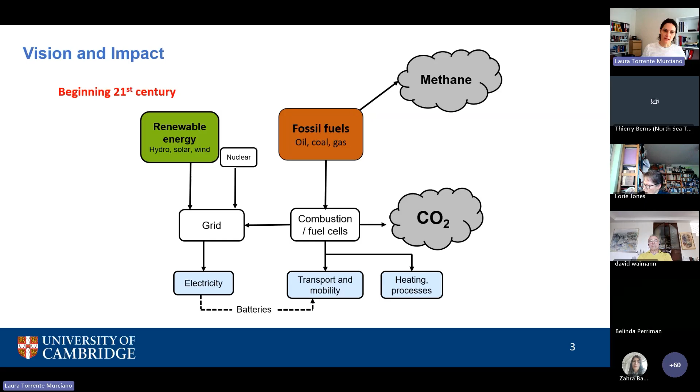Our vision is we can fully replace fossil fuels by using ammonia, and that will obviously also produce green fertilizers and decarbonization of part of the chemical industry as well.

Ammonia can occupy the space of fossil fuels because we can produce it directly from renewable energy. It will store energy, and as I said before, the methane and ammonia molecules are not that different, so they store and release energy in exactly the same way.

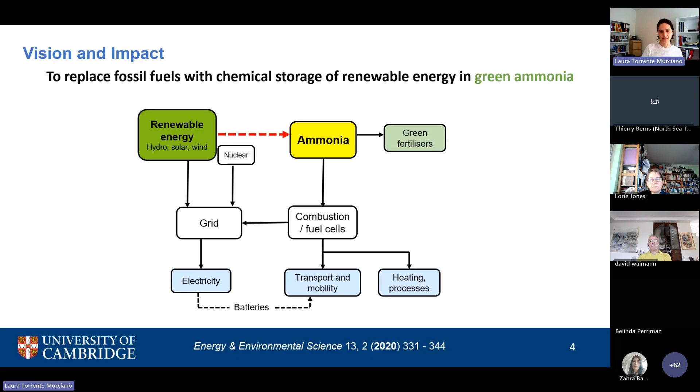Going a little more in detail about why ammonia is a carbon-free energy vector: it has a very high energy density, it can be liquefied at very mild pressures at room temperature, and it has more hydrogen in liquid ammonia than we can store in a 700 bar hydrogen cylinder, because of the high energy and volumetric density.

The other exciting thing is it's very versatile. I was saying before that fossil fuels are very good because they are versatile, we can use them in different ways. Ammonia presents similar characteristics, so we can crack it and release hydrogen. My group has been working on that for 15 years, on how to produce hydrogen efficiently from ammonia.

There is very exciting research about how to use ammonia directly in fuel cells. And the thing that is exciting me a lot these days, though I'm not an expert here, so I'm looking forward to the Cardiff presentation, is direct ammonia combustion in combustion engines.

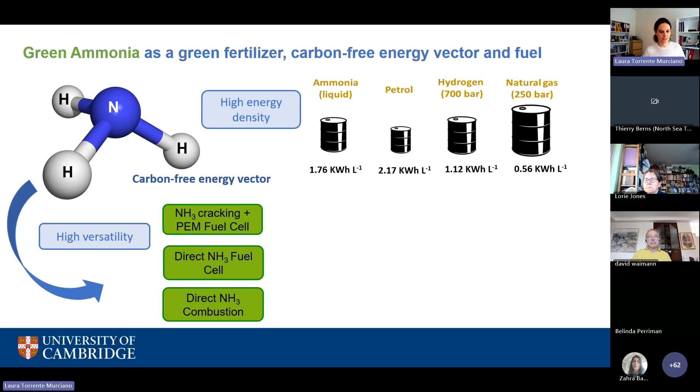The other important thing is we already have an infrastructure, a transport network for ammonia. This map shows how ammonia is distributed around the world, with the different dots being ports where ammonia is traded. This is because of the fertilizer industry, but that means we know how to handle ammonia, we know how to transport it, we know how to store it. So all that knowledge is already there.

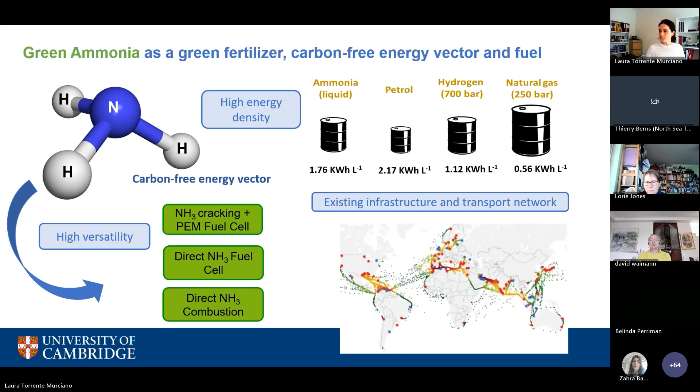Now, how do we do it today? How do we make ammonia? What are the issues of making ammonia today? Well, we use the famous Haber-Bosch process, and this is something that is so important we even studied it in A-levels. It's a process that, without going into loads of detail, consists of two steps.

The first step is hydrogen production, where we take, as I said before, natural gas, fossil fuels, and produce hydrogen. The second step is the ammonia synthesis loop, also called the Haber-Bosch loop, where we combine hydrogen and nitrogen to produce ammonia. These two steps are hugely integrated, and this is a process that has been optimized for over 100 years.

Loads of small innovations and new technologies mean this process is now reaching almost the thermodynamic limit, so it's a fantastic piece of engineering. But because we use fossil fuels, this process is also responsible for around 1.2% of CO2 emissions. To put that into perspective, 1.2% CO2 emissions is similar to the whole aviation industry.

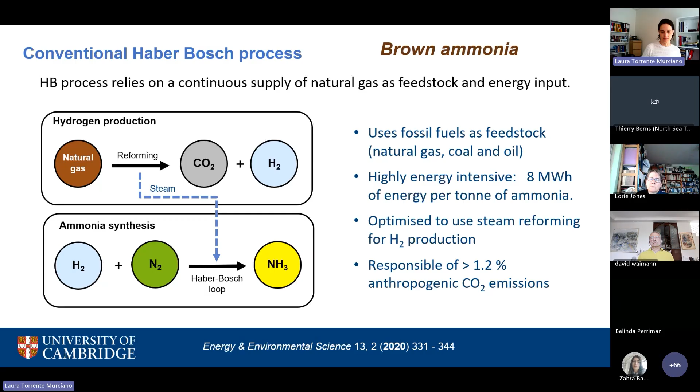So just for fertilizers, we should decarbonize this process. But if we can use green ammonia as a way of also storing renewable energy, then we will fully transform society and be able to decarbonize it.

So green ammonia is not that different if you think about it. It also has these two steps, but in the first one we produce hydrogen from water splitting, and the second one could be exactly the same. I'll explain in a few minutes why it cannot be.

The main thing is, you probably noticed an arrow connecting the first step and the second one when we produce ammonia from fossil fuels, and that is energy being transferred, integration happening between these two steps. When we produce green ammonia, that whole integration and optimization breaks down. So we need new processes to make green ammonia efficiently and, as a consequence, cost effective.

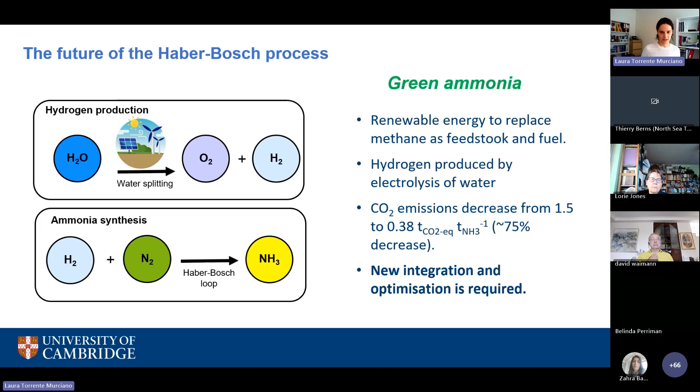So where are we? To produce green ammonia, this scheme shows we will use renewable energy, electrolyzers for hydrogen production, and then the Haber-Bosch loop I mentioned before. What we have in this cycle is, on one side, an intermittent source of energy, and that is the main problem in making green ammonia or even decarbonizing any process, what we call power-to-X chemical processes.

And then on the other side of this circle, we have green ammonia production, which runs 24/7 for years, at a constant capacity. So how do we manage this kind of imbalance? An intermittency on one side of the equation and a constant energy demand on the other side.

Well, it's as simple as putting a hydrogen buffer in the middle. So we will produce more hydrogen when we have more energy, and then we will consume it at a constant rate. The problem with that simple solution is that it makes ammonia very expensive.

So we've done calculations about what will be the cost of making ammonia in the UK. An average cost is around 1,500 to 2,000 pounds per ton of ammonia. And you can see here the breakdown, which is dominated by that hydrogen buffer.

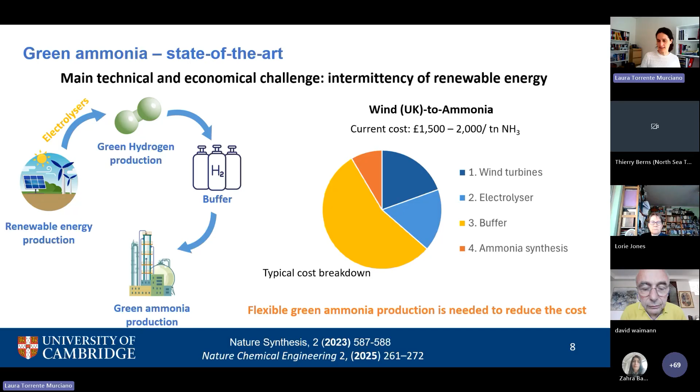So this is a trick chemical engineers know well. You separate your product and recycle your unreacted hydrogen and nitrogen. And by going through the loop again and again and again, you finally convert all the hydrogen. But it's very rigid in the way that it works.

And it's important to say that it's an exothermic reaction. So you need to be very careful with heat management. Otherwise, you can easily go into a runaway situation.

Then what we are doing is inspired by work done at the University of Minnesota by Professor Ed Cussler, now retired, who said, okay, maybe the problem is not the reactor. Maybe the problem is at a higher level, a system level. What if we replace the condenser with a different way of separating ammonia, such as absorption?

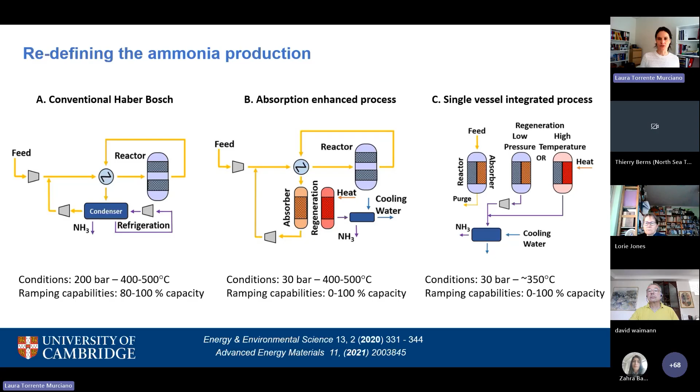So if we compare where we are today with where we want to be, we have a system, the conventional Haber-Bosch, which is designed, optimized, and integrated for fossil fuel utilization. And that is, in my opinion, a false optimization. If we want to use renewable energy, we need to think about completely new technologies, new processes, new ways of doing heat integration.

As I've said a few times, the intermittency of renewable energy is the main technical and economic challenge. This new process is also low capex, very small, so we're challenging the concept of economy of scale. It's designed for intermittent operation and distributed production. We need a portfolio of technologies to make this decarbonization a reality.

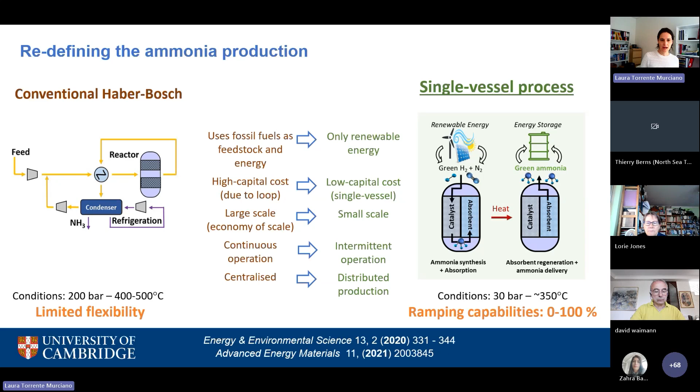Focusing on this, the single vessel process I'm presenting is a two-step process, not continuous. In one step you produce ammonia when the sun shines or the wind blows, but then you need to desorb it, release it, and that requires energy. If you do the energy calculations, you'll see that completely kills the process.

So we have also developed a technology that is able to store heat at different scales. For that we also use chemical reactions, so it's not sensible heat, it is chemical heat storage. What are the implications of this?

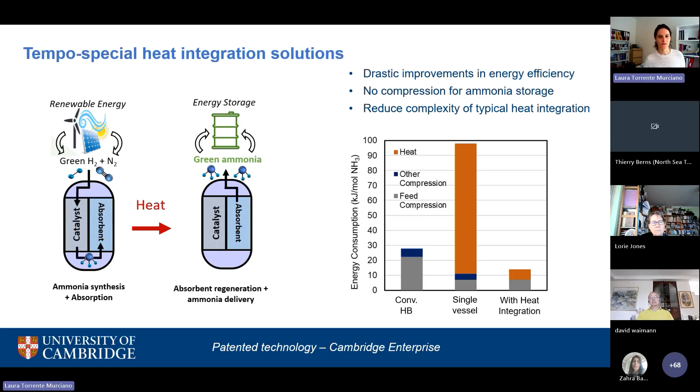Then what we do is optimize what will be the optimum combination of renewable energy production, electrolyzers, hydrogen buffer, and ammonia plant capacity to minimize the cost of ammonia. So we are doing this kind of algorithms to come up with this optimum design.

Here is where I show again that using conventional technology, conventional approaches of designing processes, it's just not possible to make ammonia, even in places with very, very high wind capacity like the UK. It's not possible to make ammonia cheaply enough. We have the technology to do it today.

Now, what we are developing is this concept: when you're talking about renewable energy and considering that the cost of production of renewable energy is dropping to the point that it's cheaper than fossil fuels, then utilization of renewable energy shouldn't be the way of optimizing processes.

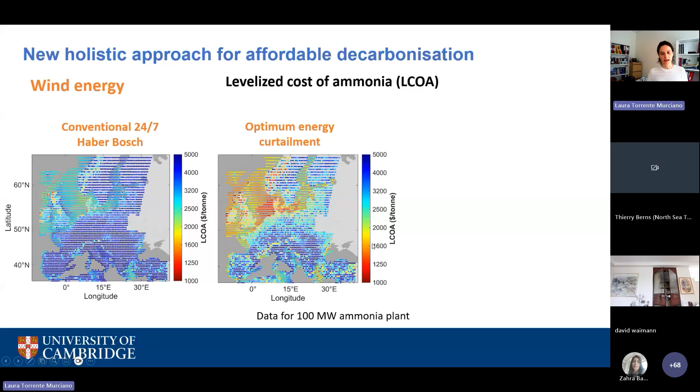Let me change the scale there to show where it is economically feasible. So if we do a combination of solar and wind, and then also use these new technologies, then you can see that we certainly can produce green ammonia cheaply enough in the UK. And this is the right time to do this - the right time to engage with politicians and so on, because the technology is being developed to make this a reality.

So these are a few pictures. This is Mitsubishi in Japan developing combined cycle ammonia turbines and demonstrating them in Singapore. This is a picture of a tractor developed in the States to use ammonia. And this is my group visiting shipping cargo in London a couple of years ago, coming from Singapore to London when the IMO was going to regulate the use of ammonia for shipping.

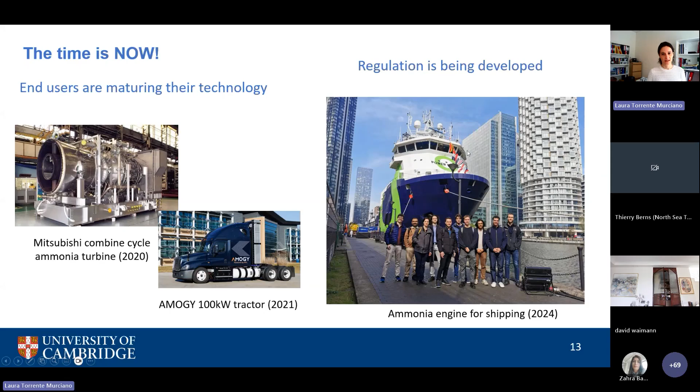So the regulation is being developed. End user technology is almost there. This is the time to produce green ammonia.

So let me finish with, again, the vision. We can replace fossil fuels using green ammonia as an energy carrier and fuel. It has different uses - for transport, fertilizers, obviously, fuel for power generation. And if we do this, then we can produce a completely new energy trade system around renewable energy, similar to the one that we have around fossil fuels today.

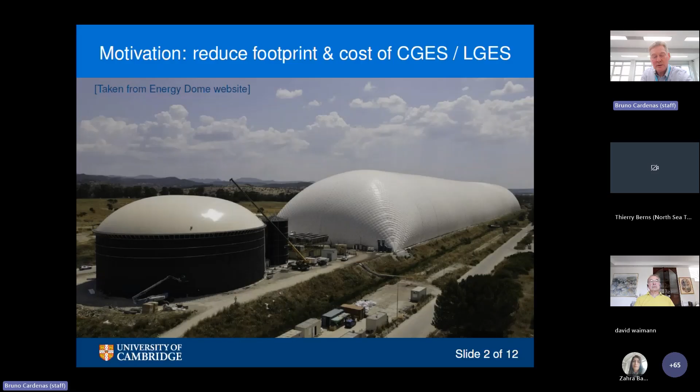In particular, we're interested in making the footprint of these systems sufficiently small that they can be applied to offshore locations where much of the wind energy generation is taking place. And we're targeting, as I've mentioned before, medium duration energy storage, of the order of tens of hours.

When one looks at energy storage applications for storing electricity, one can really divide them into short-term things managed by batteries, medium-term, which might include these multi-day wind lulls, and then much longer duration energy storage, which needs to deal with interseasonal and inter-year variations. There are significant variations in the production of energy from year to year by wind turbines.

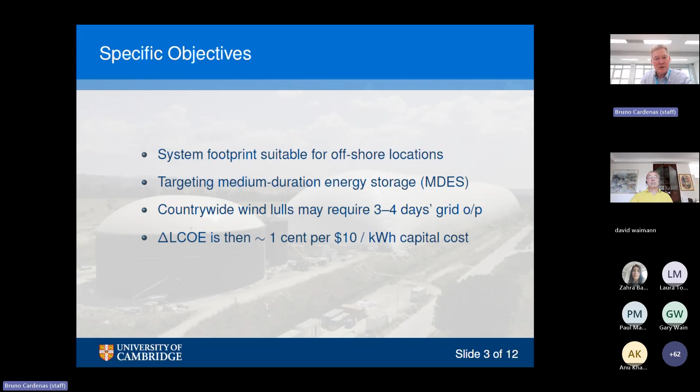The amount of storage we might need to move towards a fully decarbonized grid can be equivalent to several days of total output from the grid. And if one looks at the cost of the storage, it adds very significantly to the total cost of generation of electricity. So whereas one often talks about the low cost of wind energy generation, by the time you've factored in what's needed to make dispatchable power, the additional costs can be quite significant.

So the name of the game here is to look for storage technologies that can really reduce the cost per kilowatt hour of capacity of storage. To put things into perspective, batteries currently sit at probably several hundred dollars per kilowatt hour.

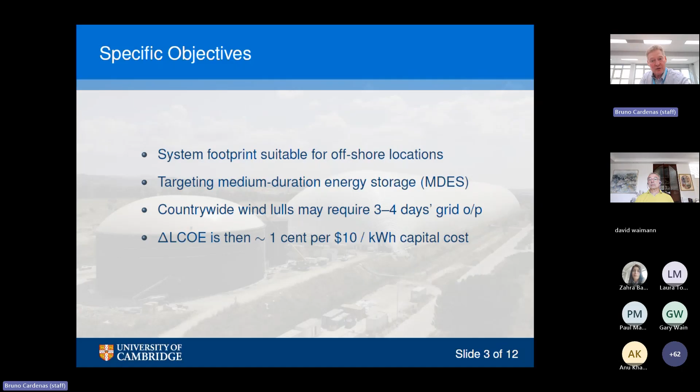So this was, as I say, I wanted to compare carbon dioxide and ammonia - I'll get onto the ammonia in a moment. The idea here is we have a liquefaction plant, and then rather than putting our low pressure carbon dioxide in the discharge state just into a large inflatable dome, we store it by adsorption into some adsorbing medium. One of the best turns out to be zeolite. Even when we do this, we find we can reduce the footprint of the storage facility enormously, because the volume of that stored low pressure carbon dioxide on the surface of zeolites is a factor of 50 smaller than just storing it as low pressure gas.

But there are some difficulties associated with this, in that getting the thermal matching between the liquefaction process and the adsorption process to match each other really requires a heat input. The other thing is that this really turns out to be too expensive, because you need probably about 25 kilograms of zeolite per kilowatt hour capacity of storage, and even with the most optimistic estimates for the cost of zeolite, that adds significantly to the cost.

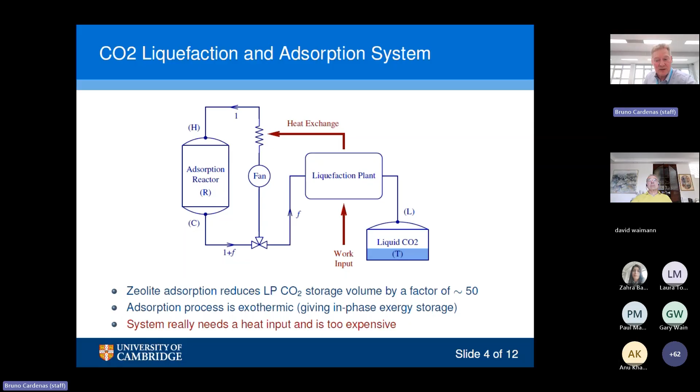Having ascertained that the cost was really a little too high for the CO2 system, we were looking into, with my colleagues in both chemical engineering and mechanical engineering at the University of Cambridge, other possibilities. So ammonia came up as really an excellent candidate for a storage facility.

So if I just emphasize the difference with Laura's presentation, where she's thinking about effectively using ammonia as a fuel - a synthetic fuel, very useful for long-term storage - the focus here is on medium duration, and we're not consuming the ammonia, we're just using it as a storage medium. One very useful feature about ammonia in this context is its very high solubility in water.

So in contrast to the CO2 system, where you'd adsorb on the surface of an adsorbent, here we're absorbing in the water. The tank on the top left-hand side is a kind of saturated solution of ammonia, what Rosa will later be referring to as aqua-ammonia. Our system comprises a separation plant, the details of which I won't go into here. We're trying to find ways of making that separation process as close to thermodynamically reversible as possible, which is a very important aspect for all of these storage technologies. By striving to obtain reversibility, we get much better round-trip efficiencies.

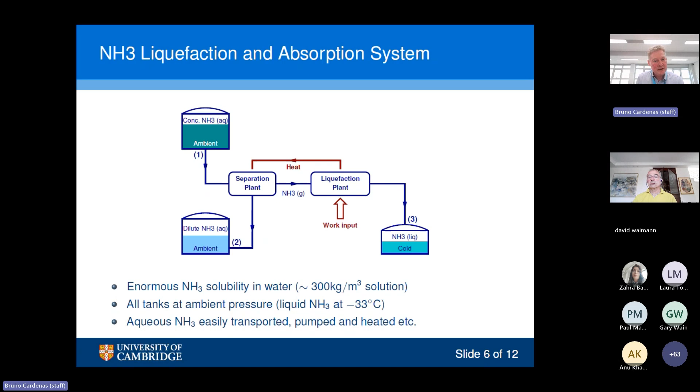In contrast to the CO2 system, because we're storing our low pressure ammonia by absorption in water, we can easily move that solution around. We can pump it, pass it through heat exchangers and so on. That gives us a lot of flexibility in plant design.

I mentioned before that the CO2 system had some difficulties associated with it, and one of those was the fact that the process really needs an additional heat input in order to obtain a reasonable round-trip efficiency.

It's interesting to speculate as to why that is the case. In order to ascertain whether a system is going to need a heat input or not, we can calculate a thing called the maximum adiabatic charge efficiency, and we can do this without needing to know the precise details of all of the liquefaction and separation plant.

We just draw a box, the control volume, the dotted line shown there around all of our plant, and we look at the conditions of storage. Once we've specified those conditions of storage, and we'd want those tanks to be at ambient pressure, that essentially fixes all those conditions, so we can work out the enthalpy and entropy changes associated with the processes.

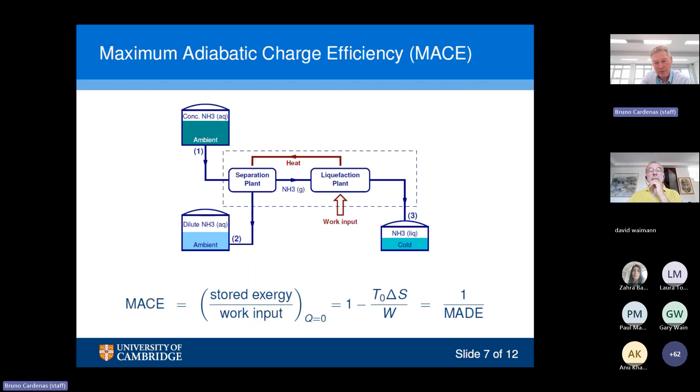And calculate what would then be the maximum charge efficiency, which is defined in terms of the exergy change, i.e. the change in capacity for undertaking useful work, divided by the actual work input. Now, our actual process may not be adiabatic, but by calculating this quantity, the MACE, we have a way of establishing whether our system is going to be able to operate in isolation without a heat input.

So very briefly, I compare on the left-hand side the best we can possibly do with the carbon dioxide system. The best adiabatic charge efficiency that can be achieved there is around about 55%. One has to bear in mind that the round-trip efficiency is the product of the charge efficiency, the self-discharge efficiency, and the discharge efficiency.

So if your charge efficiency is only about 55%, your round-trip efficiency is going to be very low, and that really tells us that the CO2 system needs a heat input to attain a reasonable round trip efficiency. We've got much more flexibility with the ammonia system, and simply by tuning the temperatures and so on, it looks like we can get a system that will be independent of heat requirements.

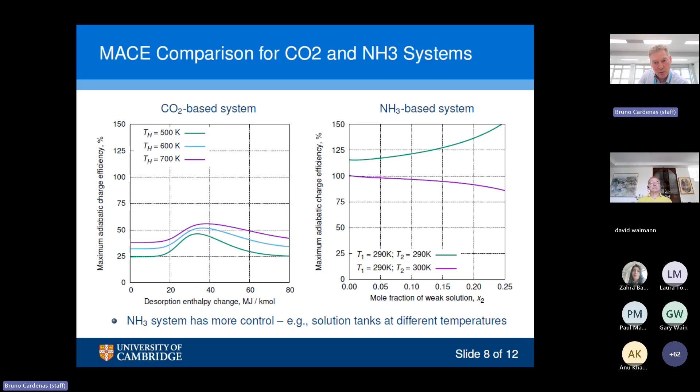I'm just going to finish off by summarizing some of the main features, things we can look at without necessarily going into too much detail of the plant itself. I've got 3 columns here: the energy dome system which I showed at the beginning, the CO2 system based on absorption within a zeolite, and the ammonia system based on absorption within water and liquefaction. The table shows some of the key features.

Because the energy dome system involves storing liquid carbon dioxide at ambient temperature, the relevant pressure there is around about 65 bar, which makes the storage process quite expensive - you have to pay for those pressure vessels. With carbon dioxide, we cool it down to close to its triple point, at which the pressure is about 6 bar, so that reduces that storage cost considerably.

But with ammonia, we can do even better. You can store liquid ammonia at 1 bar, slightly lower energy density - you see the figures there: 66 kilowatt hours per meter cubed for ammonia, 76 for carbon dioxide. But the reduction in cost more than compensates for that.

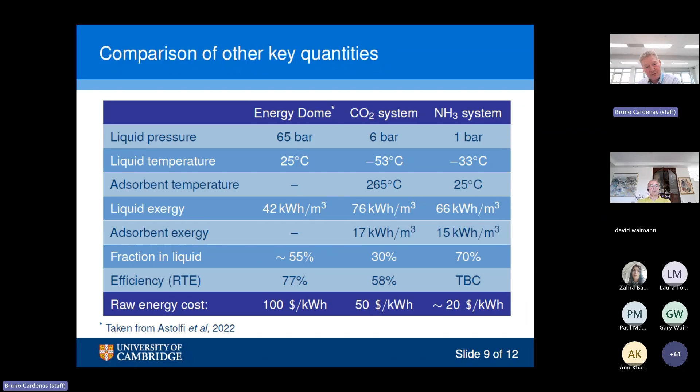Round trip efficiencies: the energy dome system does very well. The CO2 system less well. Our NH3 system is to be confirmed - there will be some challenges there, but these are perhaps worth pursuing given the benefits in terms of reduced cost. So there's some estimates of the raw energy capacity costs here - I should stress these are the costs per unit capacity of storage, not per unit of energy delivered.

And really, I can't stress enough that if we're going to try and decarbonize totally the electricity system, the demands for storage are really very substantial indeed. So getting down those per kilowatt hour capacity costs is very important.

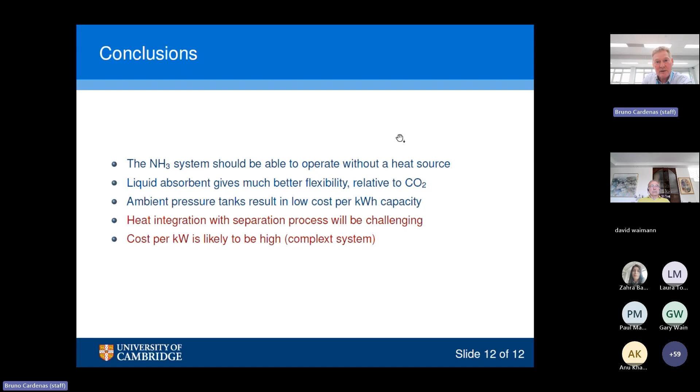So with that, I will finish my presentation and I'm happy to try and answer questions.

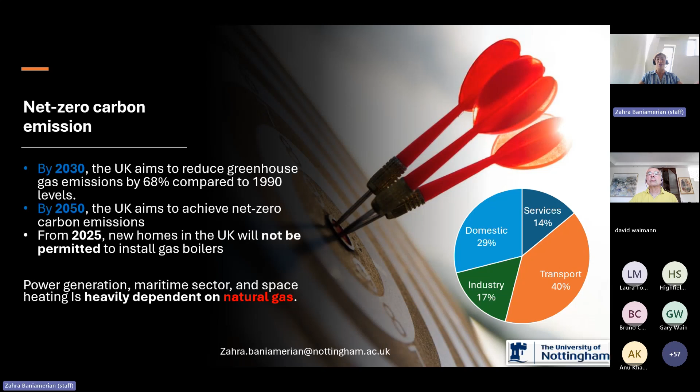So let's start. This is net zero week, so you have heard a lot about net zero targets that we have by 2030, by 2050. I'm not going to bore you mentioning all of those. The thing we know is that we are in urgent need of finding an alternative - better to say an ultimate alternative - to natural gas. It's not like we don't have any available alternatives.

For space heating, we do have heat pumps and electric heating that you could categorize together. But the problem with heat pumps and electric heating is that they cannot be an ultimate solution. If you want to shift toward using electricity for heating purposes, you will require a huge upfront cost to upgrade the grid - it strains the grid and the grid cannot handle it.

Hydrogen was also a choice for space heating. However, it does have significant storage and transportation challenges. And also we came to the point that hydrogen is not suitable enough for residential application if you want to think about it as space heating, but it still does have potential for power generation.

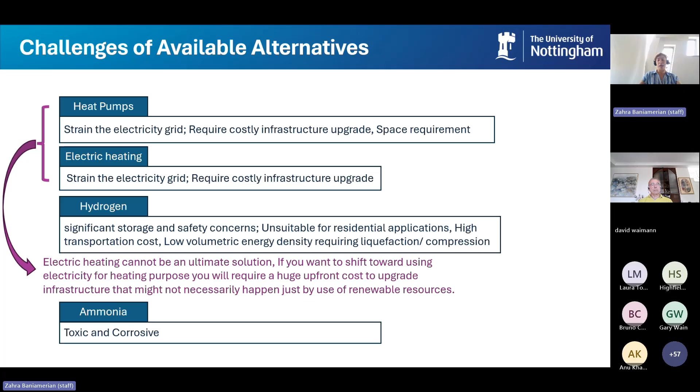As another alternative, we have ammonia, which always has a problem with its toxicity and corrosiveness. So we started a concept here at the University of Nottingham called safe ammonia or aqua-ammonia. It's formed by dissolving ammonia in water, and it shares all the benefits that ammonia has while it minimizes its drawbacks - toxicity and corrosiveness.

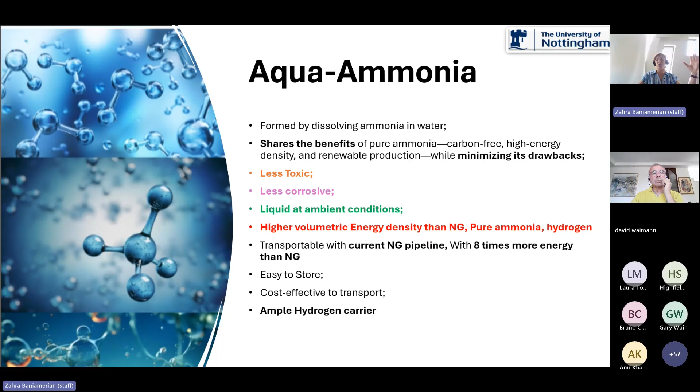Because we're talking about a dilute ammonia, it is less toxic and less corrosive. The most important attribute here is that it is liquid at ambient condition, and at ambient condition it has higher volumetric energy density than natural gas, than pure ammonia, and than hydrogen. It is transportable through pipelines - this is a very advantageous point - and it's very easy and cheap to store because you could ship it in cheap tanks above ground near ambient pressure.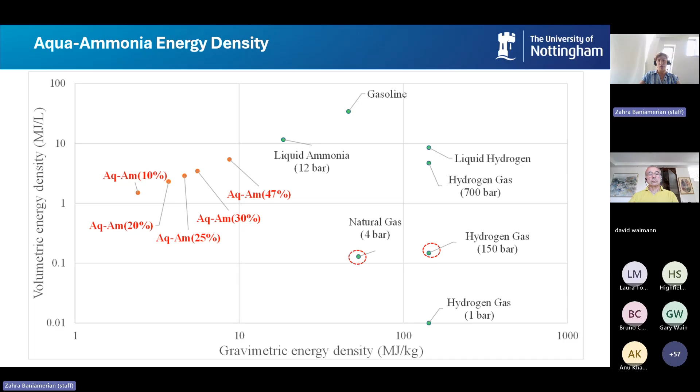At 30% concentration, aqua-ammonia is stable at ambient condition. The whole idea with aqua-ammonia is quite simple: we prepare aqua-ammonia and then transport it through pipelines. This could be a current natural gas pipeline, or it could be a dedicated pipeline, because it has a very simple structure, very similar to a water network. So we prepare the aqua-ammonia and transport it through pipeline until it gets to the target points.

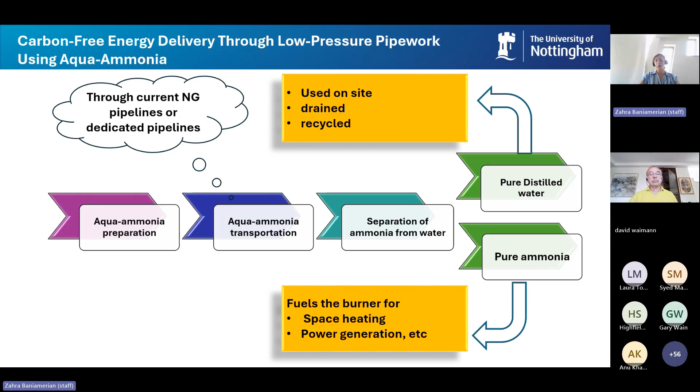Upon arrival at the target points, we separate ammonia from water. We have pure ammonia that can be used for any application currently reliant on natural gas, so it could be used as a fuel for space heating, power generation, or anything else. And we have pure distilled water that could be repurposed, recycled, or safely drained.

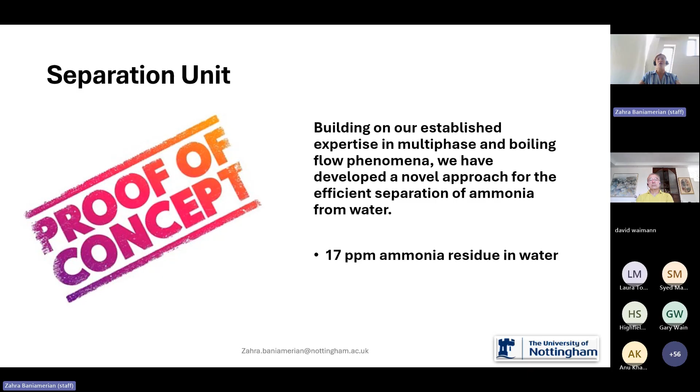We knew at first, when the idea was conceived, that the feasibility of the aqua-ammonia concept fundamentally depends on the ability to separate ammonia in an energy efficient and economically viable manner. So we started this research, and we reached the point where we can separate ammonia from water very cost effectively and energy efficiently, leaving just 17 ppm of ammonia residue in water. This amount is way below the standards for safe discharging.

Since early '23, when the concept formed here at the University of Nottingham, we secured some funding and made a demonstrator for the separation unit. We had some publications and lots of great industries on board with us. We started designing different architectures of systems using aqua-ammonia, like aqua-ammonia in power generation, boilers, district heating, aqua-ammonia heat pumps, and aqua-ammonia in the maritime sector.

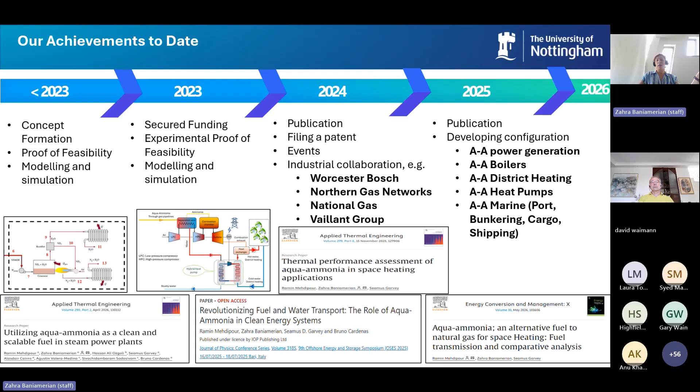I'll give you a very brief introduction to each of these architectures of using aqua-ammonia, but feel free to scan these QR codes to go into any detail you want, because they lead you to a paper we've published for each of those applications.

The first application is using aqua-ammonia for space heating. The idea is quite simple: we prepare aqua-ammonia and transport it through pipeline to the end users, which could be residential or industrial units. Aqua-ammonia feeds a boiler - an aqua-ammonia powered boiler - very similar in size to a natural gas boiler. It has an integrated separation unit that separates ammonia from water and burns the ammonia for hot water and space heating. The transmission line would be 1/3 the size of a water network.

If repurposing the natural gas network for transporting aqua-ammonia is not an option, that could still work, because we have been doing research on that. If instead it's a dedicated transportation line, the size needed for aqua-ammonia is just 1/3 of a water network, and as simple as a water network. For space heating, if we want to cover the whole space heating demand of the UK, we just need 13% of aqua-ammonia to cover that demand. And this 13% is comparable to home cleaners, so it is quite safe.

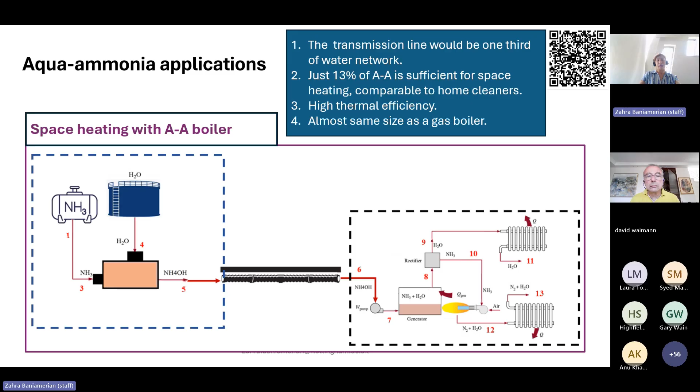Another application and system configuration for aqua-ammonia is power generation. You could prepare aqua-ammonia and transport it through pipeline to steam power plants. Here again you have more details in this QR code about how efficient the system would be. So you are sending fuel and water in one pipeline for power generation - a very good attribute, because you need lots of water in power generation units, and you're transferring both in a single pipeline.

Aqua-ammonia power plants can achieve a gross thermal efficiency of 41% and a net efficiency of 35%, and these exceed comparable natural gas steam plants. It is safer and simpler to transport, and reuse of existing gas infrastructure, like I mentioned before, is still an option for sending aqua-ammonia.

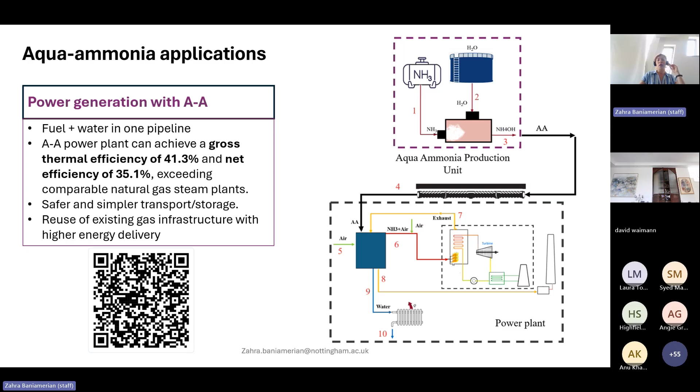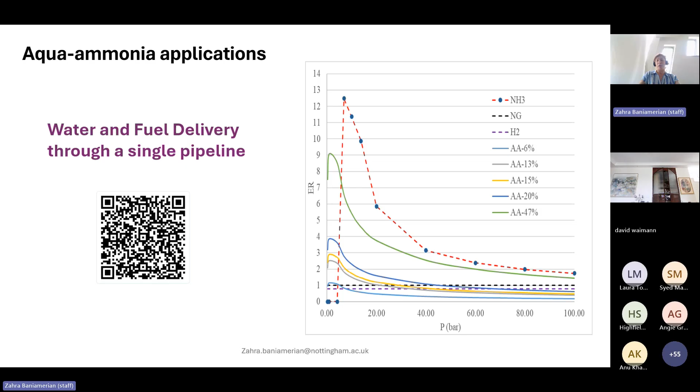So this dash line is 1, so it is the amount of energy that the current gas network would deliver. If you want to use aqua-ammonia of different concentrations within the gas pipeline, the energy ratio shows you how much more energy that aqua-ammonia could transfer through the same capacity. With 6% aqua-ammonia, you deliver exactly the same amount of energy that natural gas delivers. With 13%, which we need for space heating, you're delivering 2 or 3 times more than natural gas would deliver.

So far we had talked about the different configurations of aqua-ammonia, and now we're going to discuss how we're going to transport this aqua-ammonia through pipeline and how we're dealing with it. The best thing to start with is that we're going to revisit the widely accepted assumption that dedicated hydrogen pipelines are the best and most economic solution for large-scale renewable energy transmission. Is that really true? Does hydrogen have to remain in molecular hydrogen form during storage and transmission to be used at end use? We're going to assess that and come to a conclusion here.

So the work we did was comparing the hydrogen pathway, having hydrogen produced out of the electrolyzers. If we want to deliver it as hydrogen, we have to compress it and store it somewhere like a salt cavern, and then transmit it through pipelines and use it. This is the first pathway, which we call the hydrogen pathway.

But we are proposing 2 aqua-ammonia scenarios here. If the end user says that they definitely want hydrogen, what we do is the hydrogen out of the electrolyzers goes through a process to be synthesized to NH3, ammonia, and then we mix it with water and store it in a very cheap, above-ground, ambient condition aqua-ammonia tank, and then transmit it through pipeline. At the end, we crack it to hydrogen because the end user needs hydrogen, and that's it.

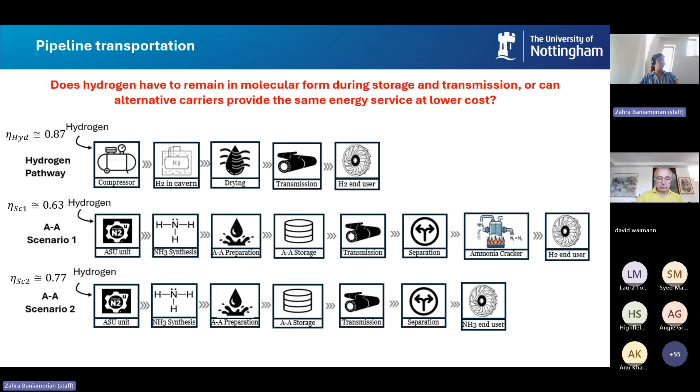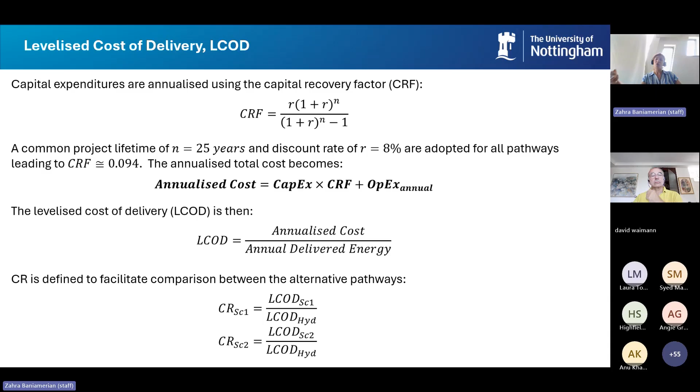The economic indicator for this comparison is levelized cost of delivery. So we calculate levelized cost of delivery for all 3 pathways, and we introduce a cost ratio that compares the 2 scenarios of aqua-ammonia to hydrogen cost to see how it works.

Here is the result. It is quite simple and informative. If you take a look at the cost ratio, any number above 1 means the aqua-ammonia pathway is more expensive than hydrogen, and any number below 1 means aqua-ammonia pathway is cheaper than hydrogen. For the second scenario, where the end user uses NH3 ammonia, we always consistently have the lower cost, and not just a small lower cost. The cost of transportation of aqua-ammonia would be about 20 to 40% of the cost of transportation of hydrogen. And if we want to do the reconversion steps to use hydrogen as an end user through aqua-ammonia, for most cases, you still have the cost ratios below hydrogen.

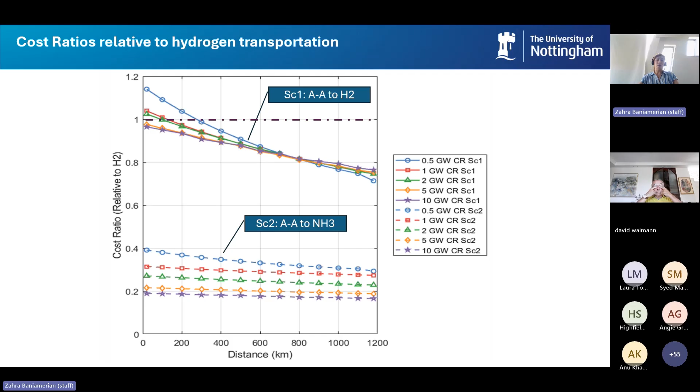And this gives very good information about how we have to transport energy.

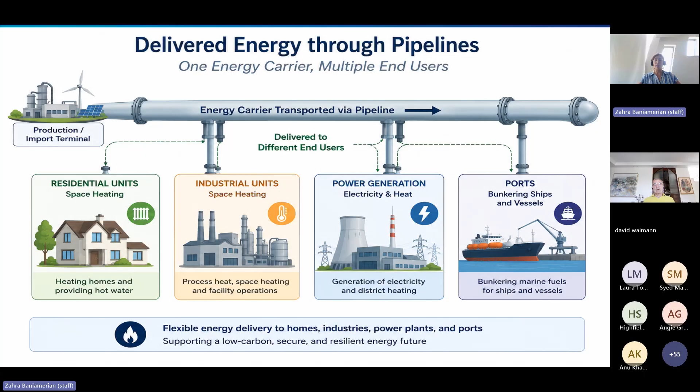So far we have looked at how energy can be transported over long distances, comparing hydrogen with aqua-ammonia as energy carriers, but transporting the energy is only part of this challenge. When we transport energy, we have different kinds of end users. It could be space heating, industrial or residential. It could be power generation. I tried to cover all of these here. And another end user that we might have is the ports, which have to do the bunkering for vessels that are going to be net zero also.

So as the maritime industry moves towards net zero, one of the biggest questions is what fuel will power the ships of the future? The truth is we don't have a single clear winner yet. There are several promising options, including hydrogen, ammonia, and methanol, but each comes with its own challenges. Here we want to assess all of these fuels, and if we want to have any of these fuels as an option for vessels in future, we need to determine how to handle the port side.

To investigate this, we had two different categories. One, on the left-hand side, is hydrogen bunkering pathways that feed hydrogen-powered vessels. So you have four options to do that. You could store hydrogen in compressed gas or liquid form in the port to feed and bunker those hydrogen vessels.

Or you could use NH3 in liquid form to do that, and then just crack it back to hydrogen. You could use aqua-ammonia in cheap tanks in the ports, and then separate ammonia from water and crack it to feed the hydrogen tanks. These are the four options we have for different scenarios to bunker hydrogen-fueled vessels.

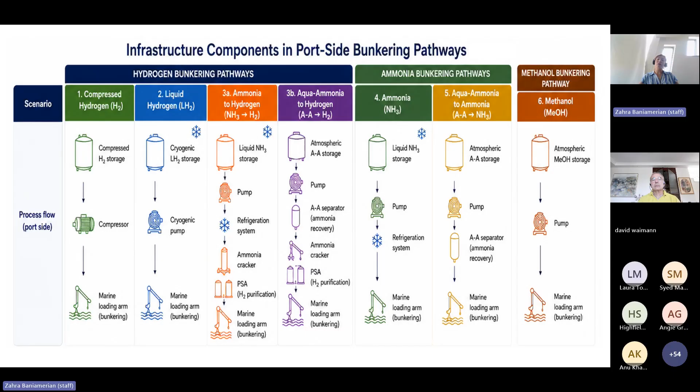But for ammonia-fueled vessels, we have two options: one, to store liquid ammonia at the ports and bunker the ammonia-fueled vessels, and the other option to store aqua-ammonia in tanks at the port, and again separate ammonia from water and do the bunkering. The last case is methanol, which is here just as a benchmark to compare the results with.

The economic indicator here is the levelized cost of bunkered energy, which we define as the cost of fuel. We assume we have the fuel at the port with the cost that is announced everywhere, so you could have access to the fuel cost. Then we have the capital cost of the devices and components shown in the previous slide, maintenance cost, and the cost of electricity for pumping, compression, and for the tanks that are refrigerated, electricity for refrigeration as well. That's all. Then we have a delivered energy that we normalize the whole cost toward.

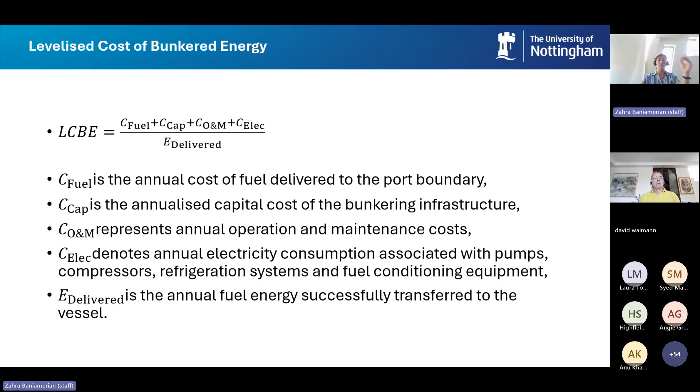So all of these scenarios are delivering the same energy. Here you can see the comparison showing the overall cost of delivering energy through each bunkering pathway. The first thing we notice is the ranking hardly changes as the terminal gets larger. We have three different terminals: regional terminals, around 70 megawatts, commercial terminals, and international terminals. So when you scale up, the cost would not change that much.

Direct ammonia bunkering remains the lowest cost option. It means you store ammonia in liquid form and bunker ammonia vessels directly. On the hydrogen side, if you look at all the options that bunker hydrogen vessels, they're almost all the same cost. Still, I want to touch on this aqua-ammonia shortly, because it does have a very good advantage that none of these systems would have, and I'm going to discuss this further.

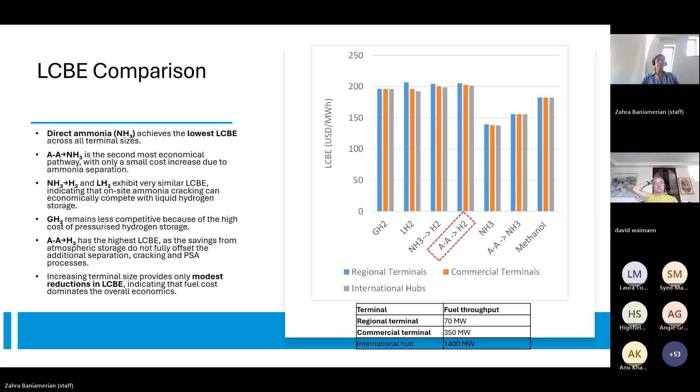So far we have compared all of those different bunkering pathways individually and identified which ones are most economical. But in reality, ports face a much bigger challenge than simply choosing the cheapest option. Today, we do not know whether hydrogen, ammonia, or methanol will become the dominant marine fuel in future, and whatever we decide now will remain in place for about 30 or 50 years. The conventional approach would be to build separate infrastructure that could handle hydrogen and ammonia, but that means separate storage systems, separate handling facilities, and ultimately higher investments, with the risk that one of those systems may become underutilized if the market develops differently than expected.

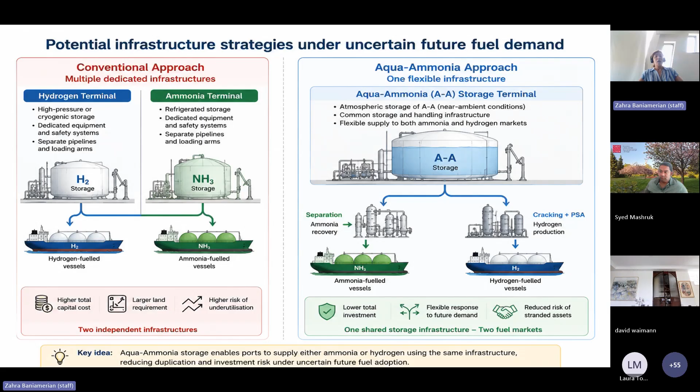But here you might ask, why would we need aqua-ammonia at all for flexibility? Somebody might ask me, you said that storing liquid ammonia at port is the cheapest option.

How come we are not using ammonia in the ports and then feed both hydrogen vessels and ammonia powered vessels by cracking it? So this could be an option.

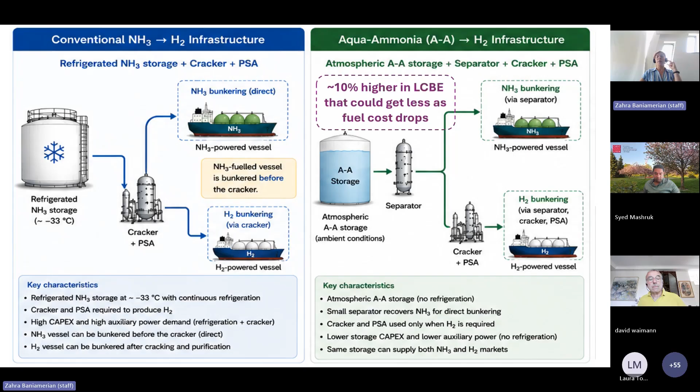If you go back to my first talk where we transported aqua-ammonia through pipeline, you could see that this option of storing aqua-ammonia at the port has another advantage, because it gets aqua-ammonia through the pipeline, while NH3 storage at the port does not have such an option at all. So with about 10% higher cost, we are achieving both the flexibility and the transportation, so the fuel supply would be much easier.

I want to wrap it up here. The key takeaway from my talk is that for long distance energy transmission, aqua-ammonia provides a lower cost alternative to transporting hydrogen. This is because of combining low pressure pipeline transport, which is very simple, cheap and inexpensive, with atmospheric storage at ports. Although we know that direct ammonia bunkering remains the lowest cost option, aqua-ammonia still provides a single storage platform capable of supplying both ammonia and hydrogen-fueled vessels, fed from a pipeline, from a transmission line.

And the true value of aqua-ammonia lies in enabling integrated, flexible, and future-proof zero carbon energy. What I want to emphasize here is that aqua-ammonia is not competing at all with hydrogen or ammonia as a fuel. Aqua-ammonia tries to enable their practical deployment. We have hydrogen, we can combust hydrogen, but the problem with hydrogen is that we cannot transport it cheaply. So aqua-ammonia makes it feasible and cost-effective.

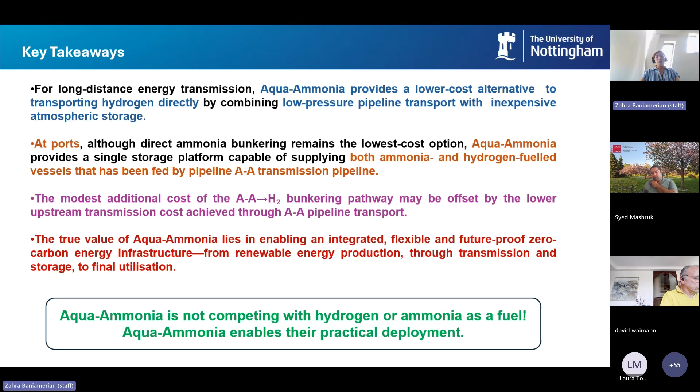So, any question here? If not, I'm going to hand it over to Syed.

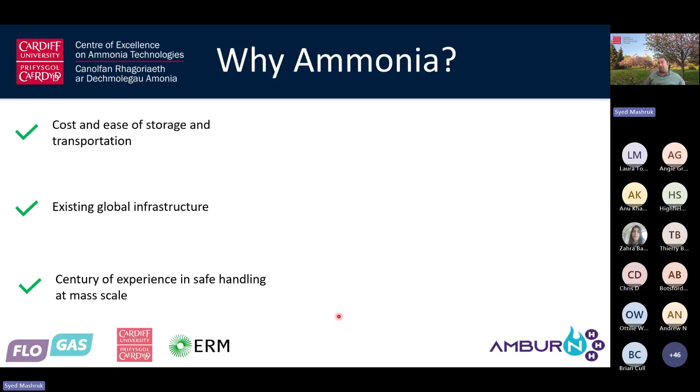When I talk about this AmburN project, we went from 10 kilowatt to 1 megawatt in less than 3 years. That's the focus - I want to have this in your mind when I deliver this presentation. So I'm not going to go through this at all, Laura covered it extensively, so I'm going to go ahead. In here as well, Laura covered it.

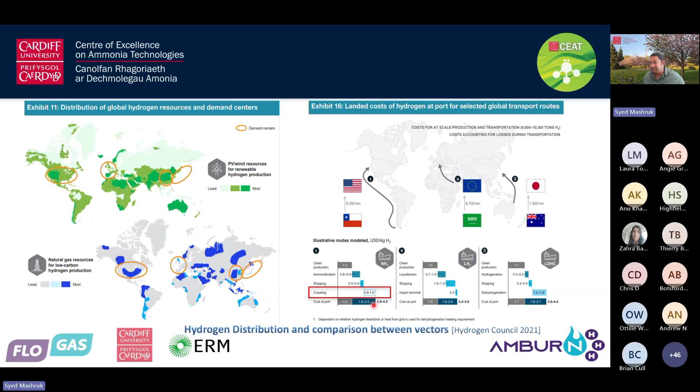Laura covered this as well, how we're going to produce ammonia, so I'm going to move on. With ammonia, we have 4 main challenges. The first one is carbon-free synthesis - Laura talked about that quite a bit. The next one is power generation, that's where this presentation comes in, at a utility scale, which this project has delivered up to 1.4 megawatt with stable and low emissions. And there is obviously the third point, public acceptance through safe regulations and appropriate community engagement.

So for this study, when you go from 10 kilowatt to 1 megawatt, or up to 1.4 megawatt, we have gone through rigorous safety regulations.

We have gone through HAZOP, HAZID, through DNV, so I'm going to talk a bit about those as I go on, and about public acceptance.

A few years back in Cardiff, we had a PhD student who looked at public acceptance in the UK and in Mexico, how the public thinks about having ammonia as a fuel, an everyday fuel. If you have interest in that, contact me and I can forward you her details and her PhD thesis to look more into the public acceptance side of things.

And finally, it has to make money, right? Whatever solutions we have, it has to make money for the world to go ahead. So on the AmburN project, the first stage was to go from 10 kilowatt to half a megawatt, and that happened at Cardiff University School of Engineering. You can imagine, having half a ton of liquid ammonia on campus with thousands of students and staff members, we had to go through rigorous health and safety studies before we were even allowed to do that.

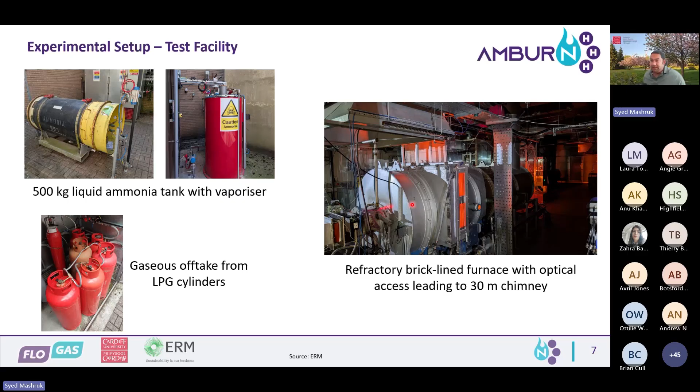What you cannot see here, there is no hydrogen cylinder in these slides, because we had a hydrogen cylinder before, and we had this small incident with the hydrogen. The health and safety study then concluded that we cannot have any hydrogen on site at this scale of testing because of the volatility with hydrogen combustion. The same conclusion was made when we went to DNV for stage 2 experiments as well.

Just to give you a quick setup: we had a ducted air fan with the premixing chamber. We started with propane as a gaseous flow, we had a flame on, and then we put some liquid ammonia to the vaporizer, had gaseous ammonia, controlled it, and now we have a propane-ammonia flame. Then for the secondary stage, we put some air through there.

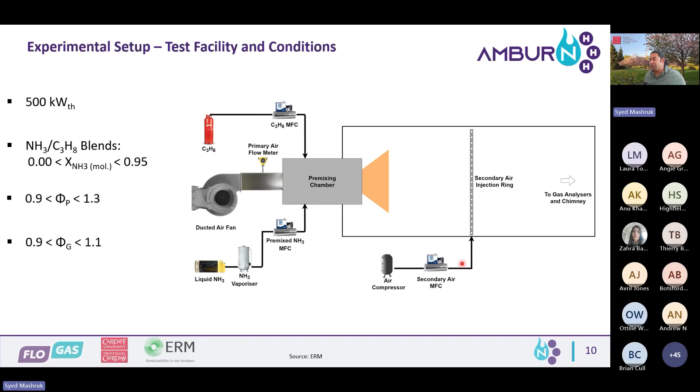The way we do it, we burn it a bit rich with ammonia so that NOx goes down considerably. When I say rich, I mean I'm not giving enough air to burn it completely, so there is some ammonia left over that's not burned. This secondary air injection then burns the rest of it.

Finally, what was very innovative about this project, we had designed an ammonia cracker that was in situ in the flame, using the waste heat from the flame and delivering a nitrogen, hydrogen, ammonia mixture to the premixing chamber as well. So finally, we completely took out the propane, and we had a self-sustaining, complete pure ammonia flame with hydrogen coming from the cracker.

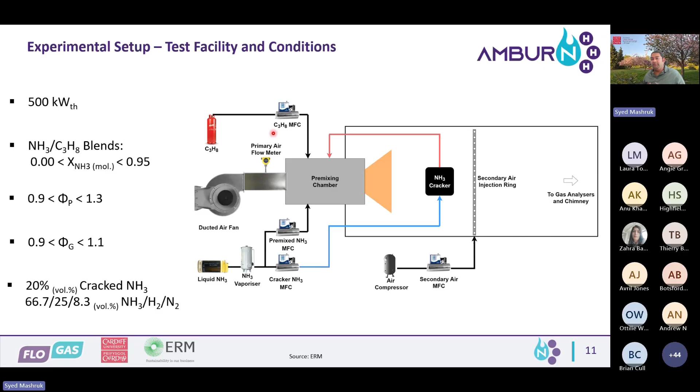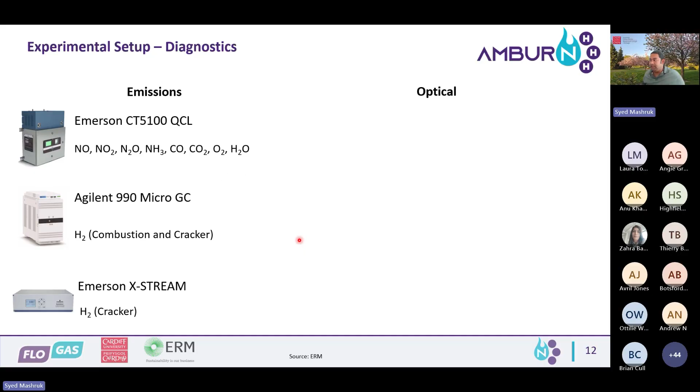For the emissions, we had a QCL emission analyzer, which could measure NO, NO2, N2O, ammonia, CO, CO2, O2, and water. We had an Agilent and Emerson X-STREAM for the hydrogen measurements. And optically, we used a LaVision high-speed camera for OH, NH, NH2 star collection, and a Nikon DSLR camera for ultraviolet images.

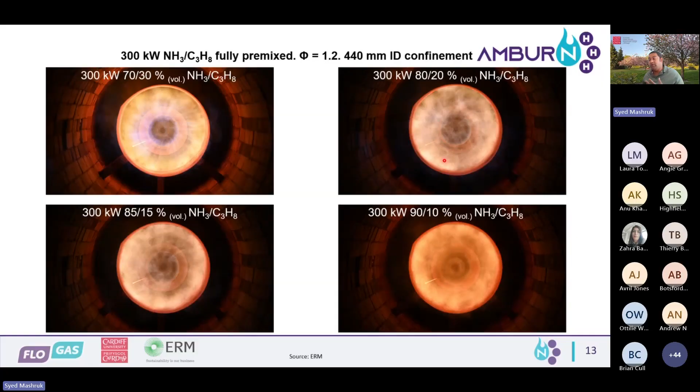What you're seeing here, there are 4 videos. The first shows 70-30 ammonia-propane, then 80-20, then 85-15, and finally 90-10. What we can see quite clearly is a blue tinge that comes from the fossil fuel at 70-30, but as we move towards more and more ammonia, you can barely see any blue tinge. What's very important to see here is the stability of the flame - it's very stable, even at 90% ammonia.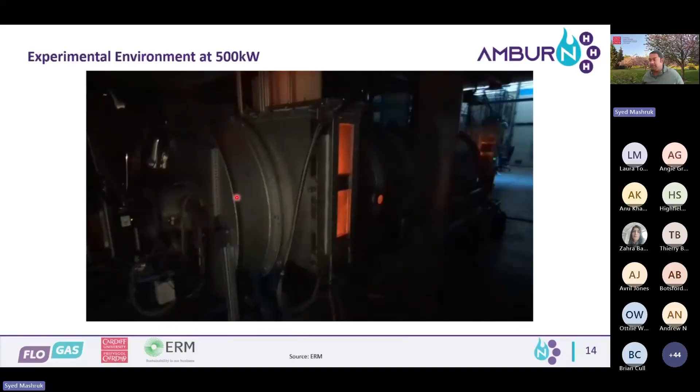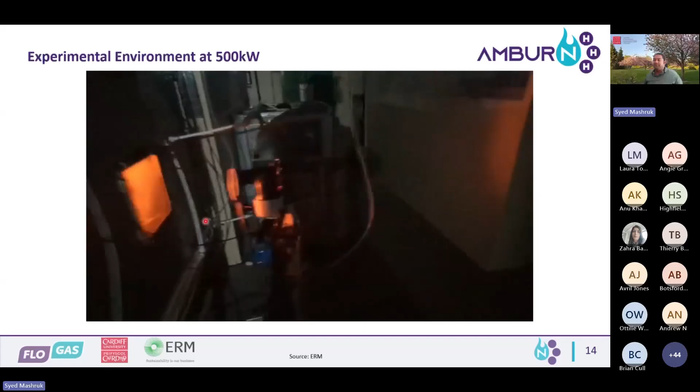This is a video of when the experiment was taken. We have air coming through here, and the patented burner designed in Cardiff is somewhere here, and you can see some flame here. Obviously the flame was so bright - this is a 0.5 megawatt flame - my camera couldn't capture it properly. We had this rig, which we call Thomas, rated up to 1.6 megawatt. We also made a window at the back end to see the flame from there as well.

We had negligible N2O, NO2, and hydrogen. N2O has 300 times more global warming potential than CO2, but we didn't measure any N2O whatsoever.

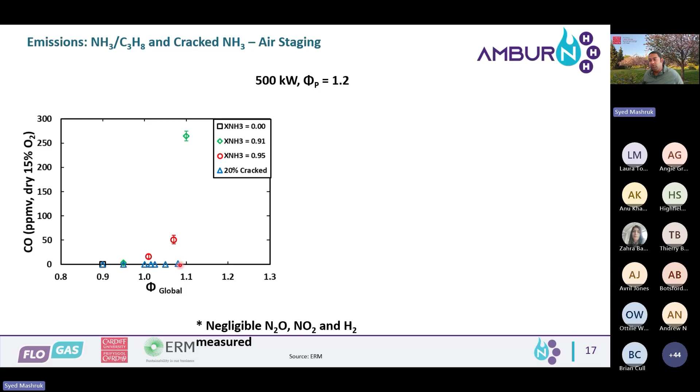For the CO, it was a bit high when you go rich globally, meaning we're not giving enough air to combust properly. But you can see with these blue ones, where it was 20% cracked, there was no carbon present, so there was no CO even when you went rich.

And finally, the most important emissions here: with 100% propane, that was my CO2 emissions. When I had 91% ammonia, I already reduced my CO2 emissions by about 70%. With 95% ammonia, I reduced nearly 80%.

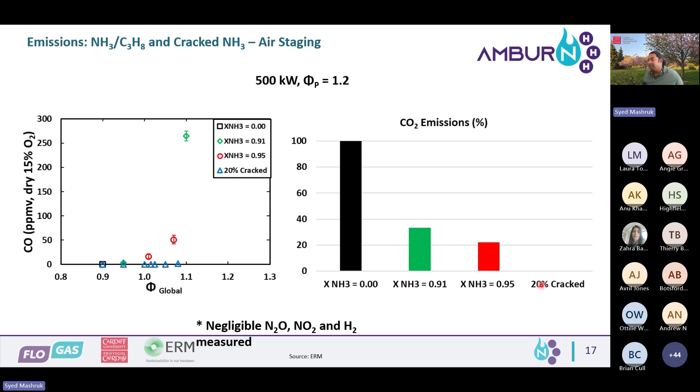And when I go fully cracked using my integrated cracking system, I've achieved 100% possible decarbonization. That concludes stage 1 of the experiment.

Then we moved on to DNV in Spadeadam in Brampton, UK, up in Carlisle, where we conducted stage 2 of the experiment. We purchased a brand new boiler that can go up to 3 megawatts and retrofitted the whole system. I'll talk about this a bit now.

This was our test site, where the boiler was situated. We had 2 LPG Flogas lines, and this was one ISO tank - that's 10 tons of ammonia - with liquid being withdrawn. Similar to the stage 1 site, we had a vaporizer collecting the ammonia, vaporizing it, and feeding it through our system.

Here are the control systems - we were all situated over here, with our electrical systems over there as well. And over there you can see where the air fan was situated; the air was supplied from here.

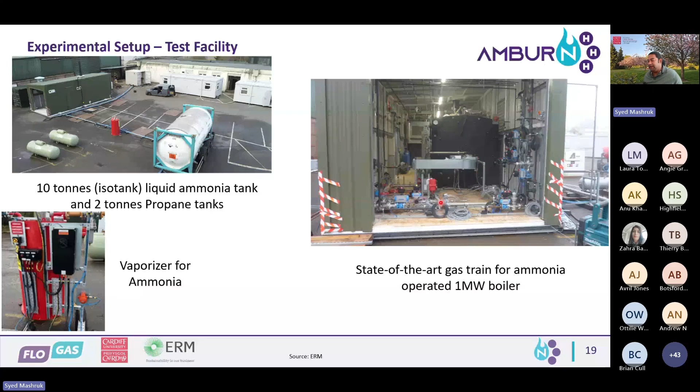Now, the safety system - we went through nearly 1 year of safety study before conducting this test. You can see the amount of safety features and work we put into this. But DNV did not allow us to have hydrogen of that magnitude on site, so we couldn't supply pure hydrogen through compressed hydrogen gases. That made things more complicated - we had to make the ammonia and cracker cases more robust, with more safety features built in.

And finally, here you can see the flame. This flame is very orange, meaning it's mostly ammonia. And here we can see we are producing steam - under load, I'm now burning ammonia and producing steam.

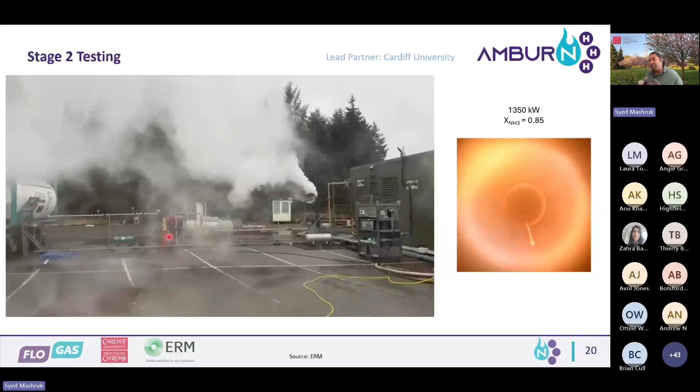This video was taken from the control room. We had an endoscope at the back of the boiler so we could see live pictures and videos while monitoring during testing. Here you can see when you go to nearly 1.4 megawatts with 85% ammonia present, the flame looks very lovely and stable.

Moving on, I have some more. The first row here is all 1 megawatt with different ammonia concentrations, from 75% to 90% ammonia. You can see the blue tinge here, and it keeps fading away as I put more and more ammonia in.

Then finally I tried to make very high ammonia cases. I was limited by my control valve that was controlling it, so I slightly reduced my power as I increased the ammonia content. But again, the flame was very, very stable, and this line you see here is actually the igniter that ignited the flame.

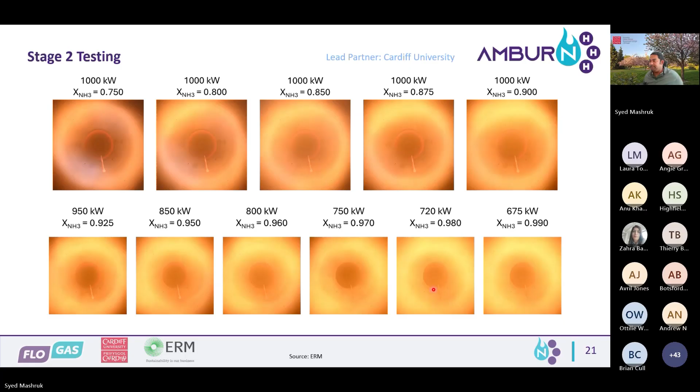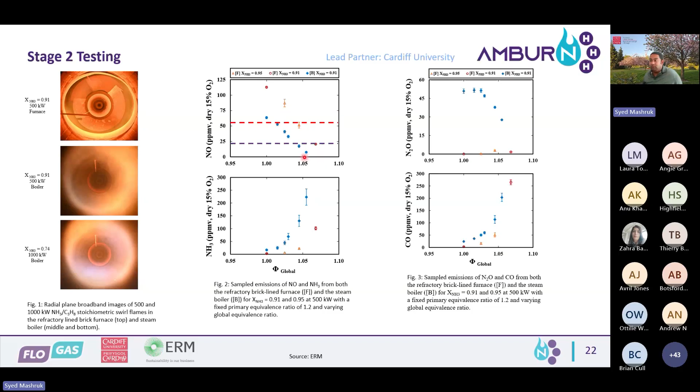But then again, more study is going on here to work on it in more detail, so we are looking for future funding. We are working with Rosa to get future funding to combine this aqua-ammonia and boiler at the same condition. I put these two lines: the purple one is the limit for a new boiler, and the red one is the NO limit for a retrofitted boiler.

Similar graph here, but what I want to show is this: we have comparison in literature from 5 kilowatt up to only 50 kilowatt of data. In this study, we did it up to 1.4 megawatt, but unfortunately on the last day our gas analyzer wasn't working, the heating line broke down under the heat. So we only had data for 500 kilowatt, but you can see the comparison - we are actually, emissions-wise, in a very nice place.

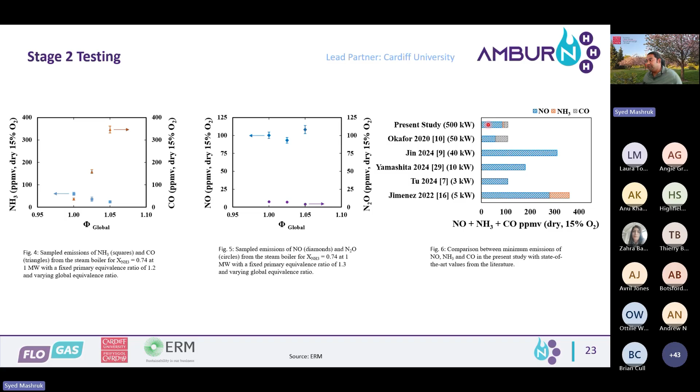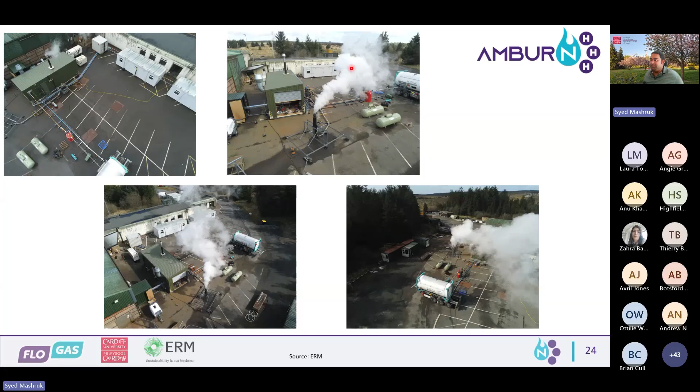This is some drone shot while we were testing. This here is the exhaust gases coming out, and this here is the steam being produced. Finally, this is again a nice video of the steam being produced.

We have just shown with this demonstration that ammonia can be used for power purposes via combustion. We are looking for future funding to go more into this and make it more so. This system that we've designed and demonstrated needs at least 1 or 2 years more of iteration to be consumer ready, to be self-autonomous, and that's still looking for future funding.

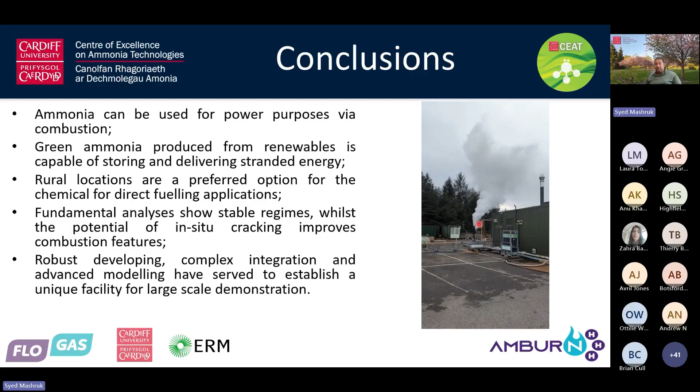With that, I think I'm just in time, Rosa. Yes, Syed, you were, and actually I myself was not in time. Thank you so much, thanks for your great presentation. So any question here for Syed?